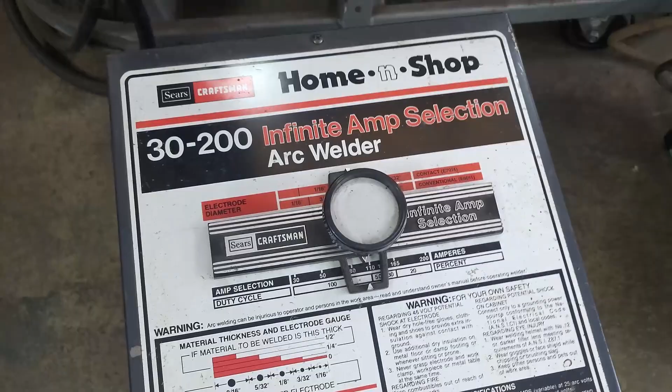This machine in particular is pretty old, probably like 20 plus years old, and it's very heavy. It's a transformer type, but these are known for being very, very reliable. I've heard of guys leaving these out in the rain and then letting them air dry and they fire right up, no problem. I've used it to repair a wood stove and a couple small projects, haven't had any issues with it. It's just really, really heavy.

The next one up here, I've had this for a while too, like 10 years. This is just a cheap little Everlast Supercut 50P plasma cutter. It does come equipped with a 115 volt plug and a 220 volt. And I'll be honest with you, if you try to run this on 115, it's not gonna run very well. However, once you add a 220 volt plug to this thing, it will cut through pretty much anything, even for a cheap machine. This machine right here, I bought it almost 10 years ago for like $400.

And it did actually run on my 8-gallon compressor. It did have to catch up every once in a while, but I used it to cut the holes out on the heat exchanger on the waste oil heater. So great little machine, I've used it quite a few times. Comes in handy to have, and fairly inexpensive. By the way, I forgot to mention that these stick welders, like that one right there, you can pick those up pretty cheap. They're like 50 to 100 bucks if you want to get a really good stick welder.

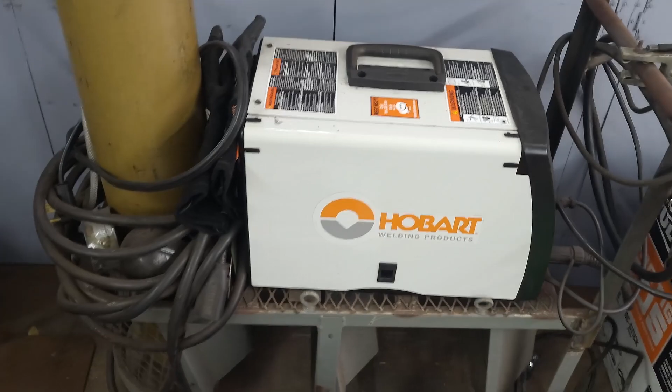Obviously, the next one is my Hobart 190, and my friend and I swear by this machine. We've had this machine collectively between the two of us - he has his own, obviously - but the two of us have owned it collectively for 25 years. And the only thing that has ever happened as far as issues is the wire, the wheel of wire in there will unravel itself sometimes. And the only reason it does that is operator error - you didn't tighten down the tension nut enough. It's a big plastic nut in there that keeps tension on the reel. And that's it, I've never had this thing not work.

It's worked awesome. And the newest machine here is the Vulcan ProTig 205, and I have zero experience using this. I actually bought this after watching many YouTube reviews and people using this machine, seeing how it performed, and going back to some videos where people used it for a year and did another review. It gets a lot of praise on YouTube from a lot of guys that use these, and some of them even do compare it to a Miller. So those are the four machines I have.

So I'm gonna have to build a new cart. The cart that the Hobart's sitting on was actually a cylinder rack that I took out of a work van when I used to work at a junkyard. It served its purpose - it was a little bit of a recycled job, just something to get the welder on to roll around. And the only reason I'm putting them all on one is I don't really have a ton of bench space. I mean, I could put one right there, but that's just one machine or two machines.

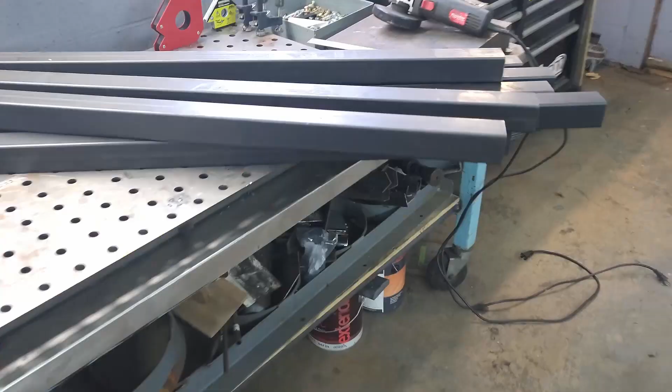My plug is right there, so I need something I can roll all four machines around on. I don't necessarily have a big shop, but all my bench space is becoming premium real estate. So as far as building this cart, I could have bought one. There's only one cart I found, and it was about $300.

It holds 2 or 3 machines on top, but it wouldn't hold all the weight. So I ended up just deciding to buy all the steel, 2 by 2 by 1/8 inch. Total cost for all of this, there are 8 four-foot pieces, so 32 feet of 2 by 2 square tubing, 8 inch solid rubber wheels, some casters, and a little extra steel in case I need it. Total cost for everything on this table was around $250.

So I'm going to end up building something bigger. It'll house all 4 machines, and I think it'll be a lot more sturdy, because a lot of the welding carts out there only hold 1 or 2 machines, maybe 3 max, but they're kind of flimsy, thin sheet metal cabinet-looking welding carts. And the total weight of all this is pretty heavy, around 411 pounds for everything on the cart.

The one big thing that's adding a lot of weight is this cylinder right here. I have a 300 cubic foot cylinder for the TIG welder, and I have my 125, so that's a lot of weight.

First thing I'm gonna do is sketch up what this looks like, take all the dimensions, and draw a diagram. I normally use my 2D CAD program to design things, but I think I'm just gonna go old school this time and draw it out on paper.

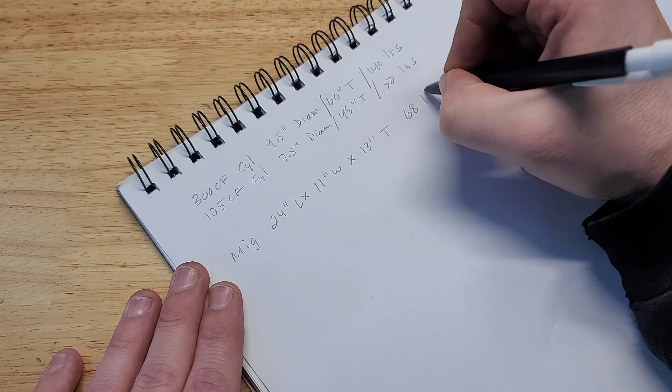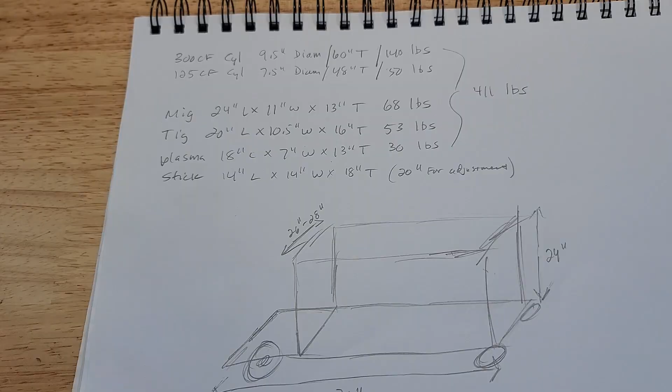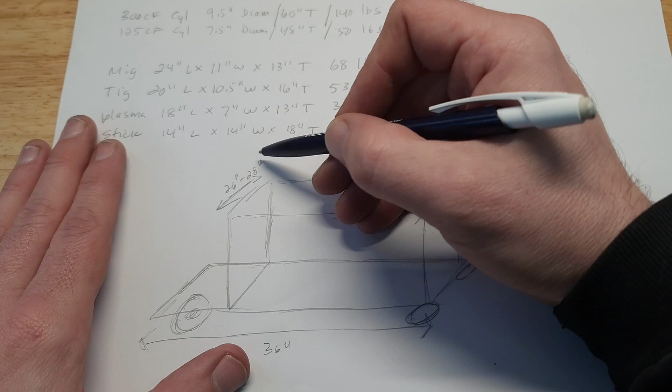All right, that wasn't too bad. So this drawing is the basic setup, the most basic version. You might have to extend some pieces up and over this way so that when I put the cylinders here, I'll be able to tighten them down so they don't move. But if I were to make it as simple as possible, this is basically it.

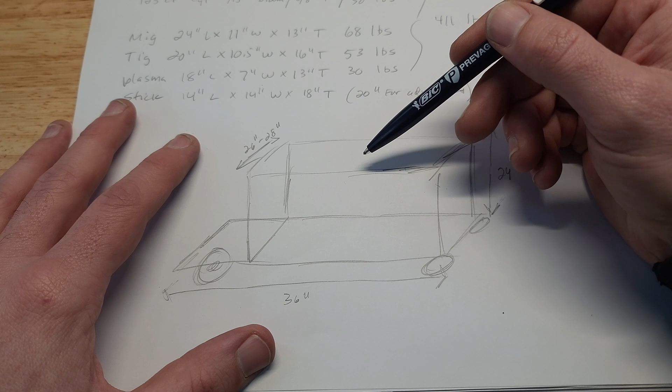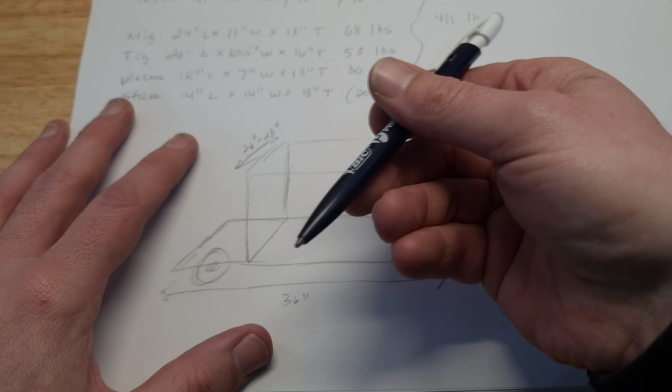It's just a rolling cart. Now keep in mind, I said I could have bought a cart, but I didn't find one exactly to my needs, because the way I want to do this is 2 machines on the bottom and 2 machines on top. I'm going to do stick and plasma on the bottom, and the MIG welder and the TIG welder on top. They'll all be facing this way, only because the way it'll roll up to my table, the plug will be behind it all the time.

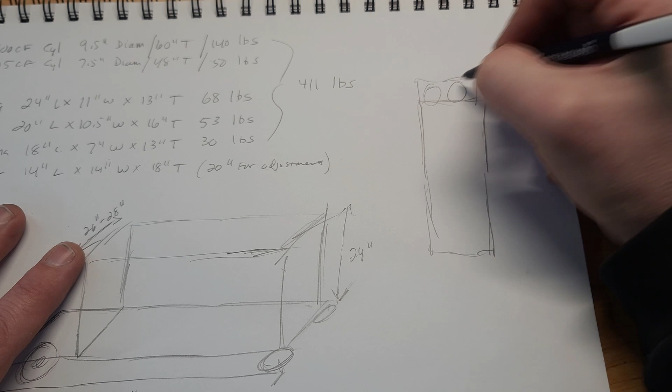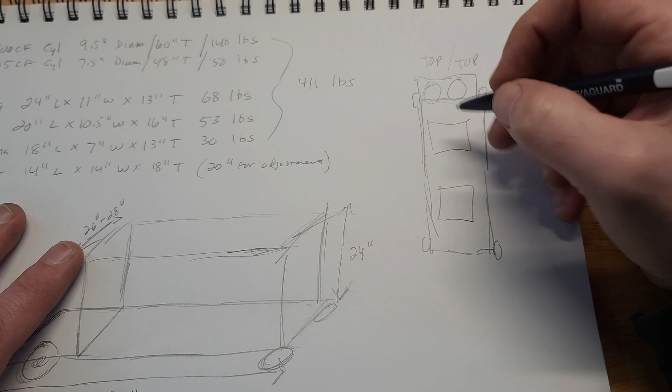So basically what I want to do is draw each shelf. If this was the bottom shelf, it's going to be more square, but you get the idea. I'll have a cylinder here and a cylinder here, and obviously my wheels will be here. And I want to do the 2 machines. This is the top, like a bird's eye view, this is top of the top. So this would be my MIG, and this would be my TIG. And then the bottom would just be the stick and the plasma.

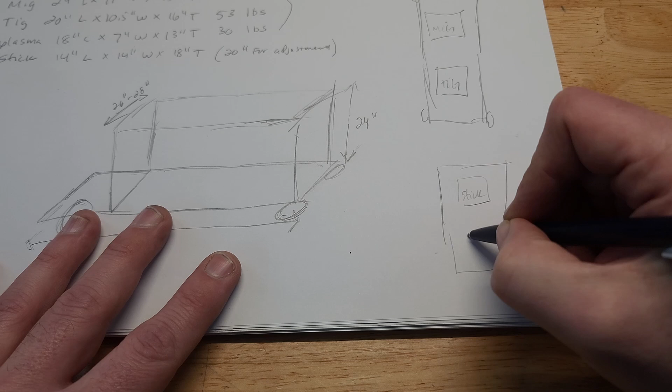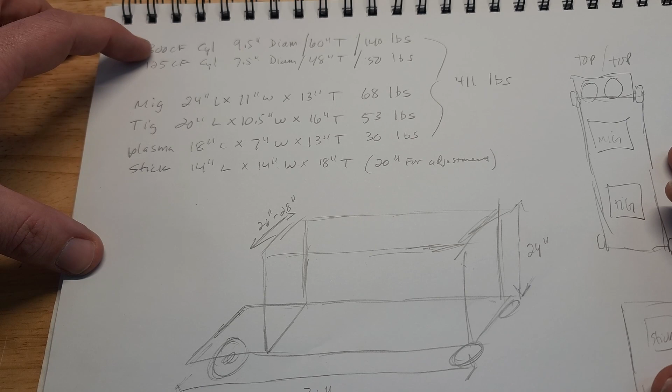Pretty easy to draw. I mean, like I said, this is just like a rolling cart, but I like to lay everything out, get all my dimensions, the weight, to make sure I have wheels and casters that can handle that much weight, and all the maximum dimensions of everything together, because the MIG and the TIG will be on the same shelf. So I need to build it wide and long enough to accommodate both of them side by side with maybe an inch or 2 of space between them.

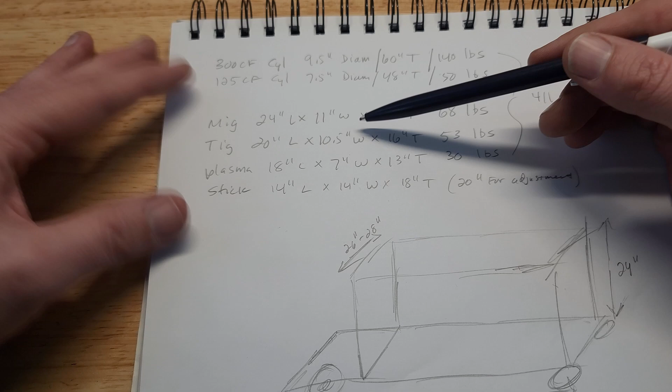So normally I would have done this in my CAD program, but I figured this wouldn't take very long. It probably took less time to just draw this out than to go down to my computer, fire it up, and open the program. So let's start cutting.

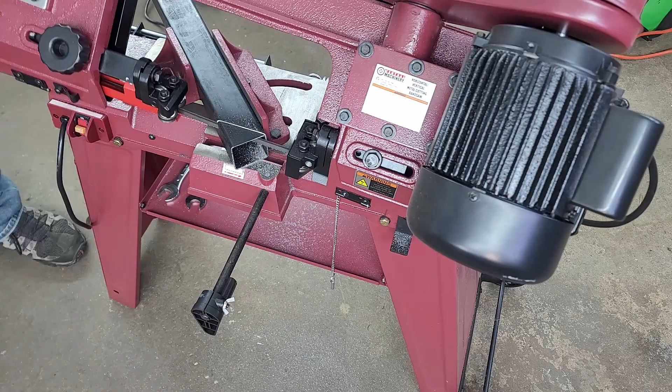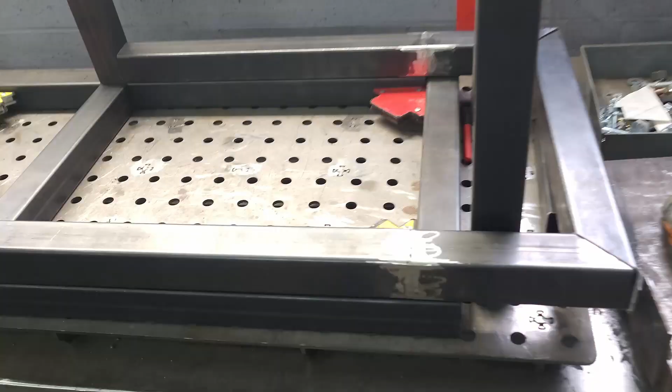All right, got all the pieces cut, and I actually made a mistake. You can see where I had to pay for that mistake. I wanted to orientate the welders on the top side by side, but I totally forgot that I can't have the MIG welder facing this way because I need to be able to change the wire out. So I paid for that mistake by having to re-weld a piece back on. Not a big deal though.

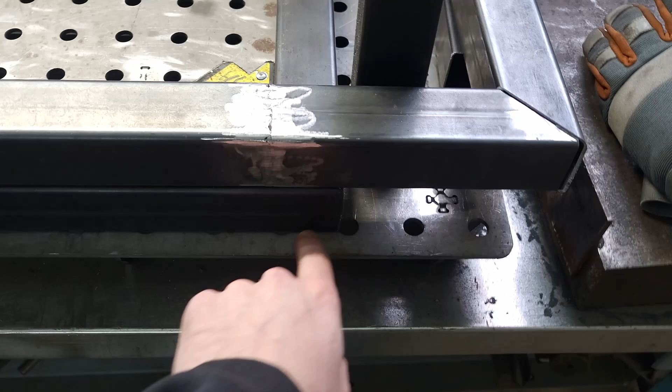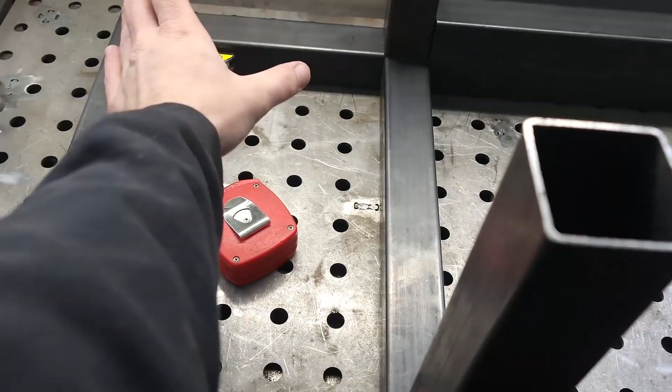So this is basically what it's going to look like right here. Kind of looks a little funky. It's not set up correctly because I haven't tacked it, but this piece here, the bottom, that's the bottom shelf. These are just simulating 4-foot pieces. They'll come up 4 feet, and I'll probably put something across them. So the two tanks will sit here next to each other. This whole second shelf will be up on top of here, and that's why I'll have the two welders here, plasma cutter, and the stick welder, or vice versa.

So it actually works out because this is going to have that amount of overhang, and I could put some hooks on it or something to hold the welding helmet, gloves, whatever. I had purchased just enough of the 2x2 square tubing to do it. Luckily I didn't screw up too bad, I just had to weld a couple pieces back together. I would have liked to have had it a little bit shorter, but live and learn, right?

So I'm gonna get this all tacked together. I may build the shelves first, like the floor of the shelves.

And for that, I wanted to talk just one quick second about the price of steel, because steel has gone up quite a bit. This is what I was originally gonna use, just expanded steel, and use some 1/8 inch bar stock flat steel or something just to kind of give it a little support.

Now I bought this piece right here a while ago to make a guard over the belt on the waste oil heater. I can tell you I paid maybe 20 bucks for this, for a 2x2 piece of expanded steel. Nowadays, if you go to buy a piece of this at Home Depot, it only comes in 1x1 foot squares, and it's not as thick. It's very, very thin. It's very flimsy.

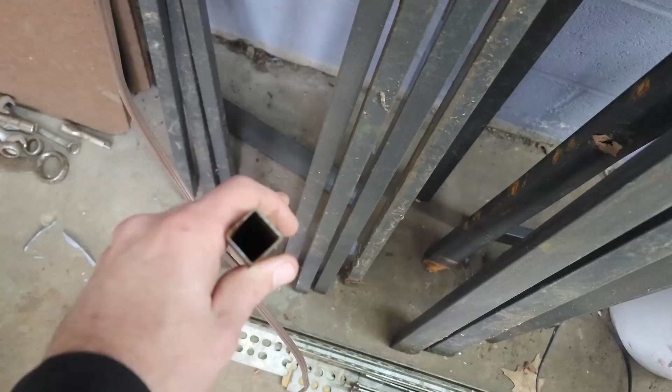It came with other pieces of tubing, like this, I think it's 1/2 inch by 1/2 inch square tubing. It's kind of thin, but it's usable steel. It's all powder coated, so it has a little surface rust on it, but I think it'll clean up pretty nice, and it's very, very rigid. It's definitely gonna be a lot more rigid than if I had used the expanded steel. So that's how I'm gonna make the shelves out of it.

All right, here we are.

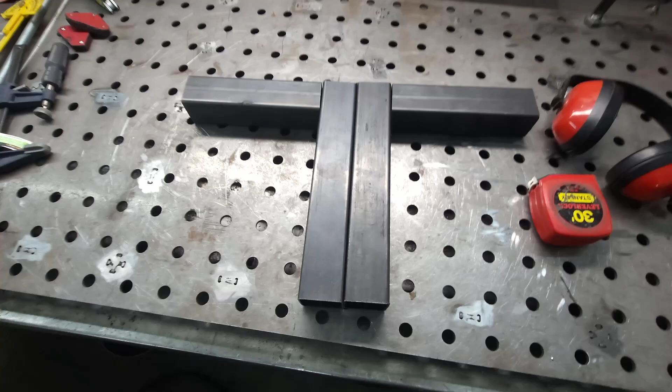I got a little exploded view for you before I start welding it together. I got my 2 towers that the cylinders will get fastened to, secured to, and I had just enough scrap steel left over to put a bar across. It might look funky, but I'm thinking if I extend this down a little bit and put caps on it, I could actually put my filler material in there, my filler rods for the TIG welder.

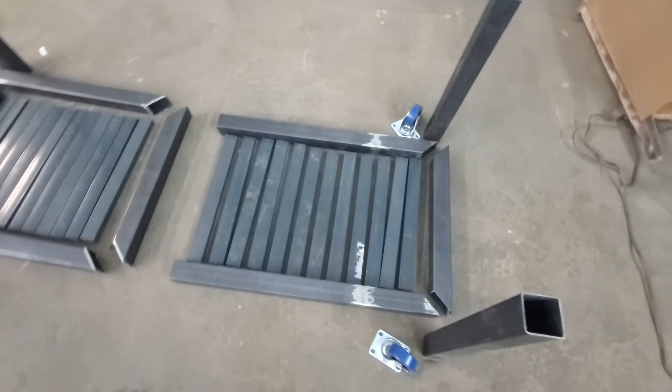So, back to this. This is the bottom shelf here. It's kind of together how it would go. These will all sit flush up against the top when it's all welded together. This is the bottom shelf. Once this is welded together, it'll be welded on top of these, and then these will just be butt welded right against the top posts.

So, all in all, it's gonna be pretty beefy. I think it's gonna suit my needs just fine, and I built it beefy because it's gonna be carrying around 450 pounds of weight. So we'll see what it looks like when it's done.

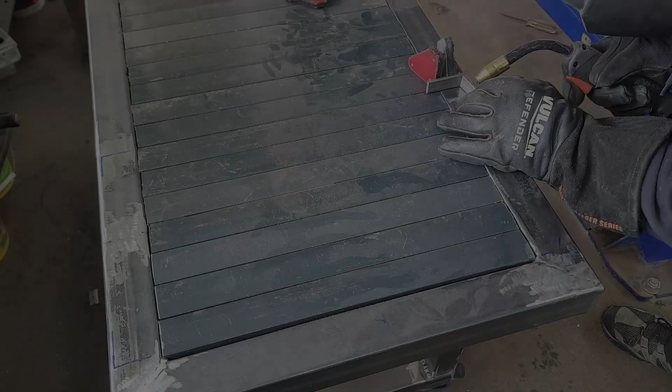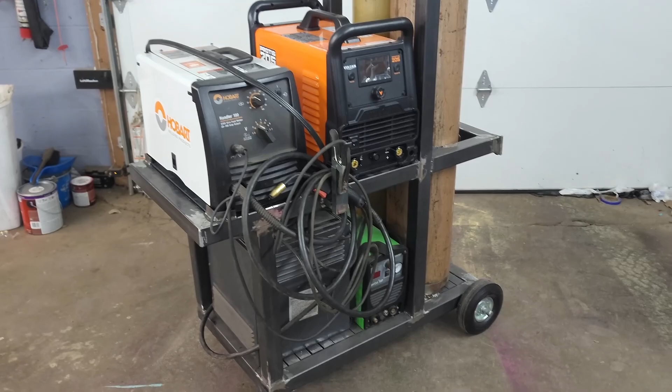Well, there she is. She's looking good, and she's heavy. As you can see, I did add one hook right there for the MIG leads for now. I may add a bar that goes across the top with a couple hooks. I kind of want to set up all the machines, add all of their cables, and then I can figure out where it's going to naturally fall on the machine so that they're not just hanging off the side.

Because honestly, I don't really like that, it kind of looks sloppy. But for what I need this for, it's gonna work. There's a lot of weight on that cart, and it rolls around really nice. I gotta add a handle.

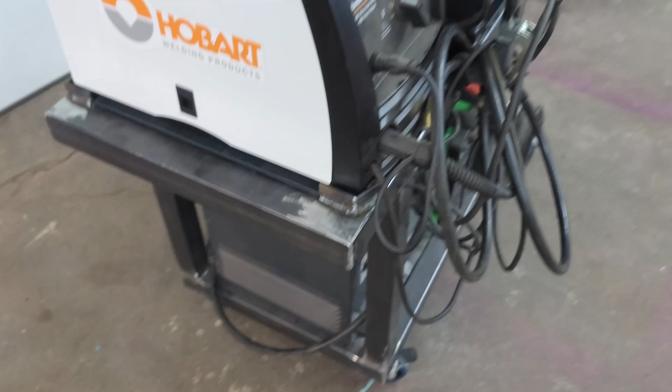See, I have to be careful where I put my handle because I have to be able to open this door. So I could probably put one right here, but it's actually not that bad to roll it around. It rolls nice. I did put locking casters on it so it's not gonna go anywhere.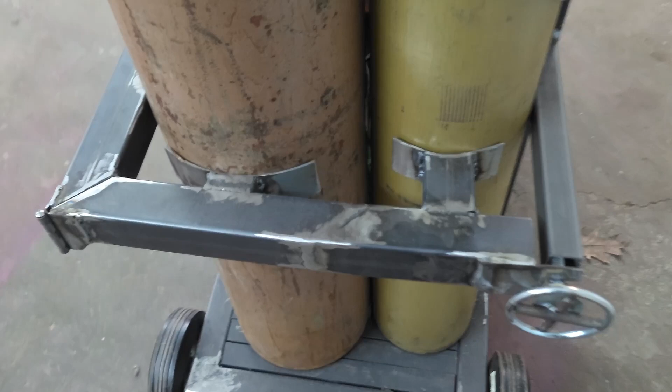Got my cylinder lock bar, which is kind of a mistake. I'm willing to admit my mistakes. What I should have done is just square up both bottles to this bar and put this behind it to simplify it. I spent way too much time doing this, but it works. It locks the bottles in place. It's not going anywhere. These are real tight.

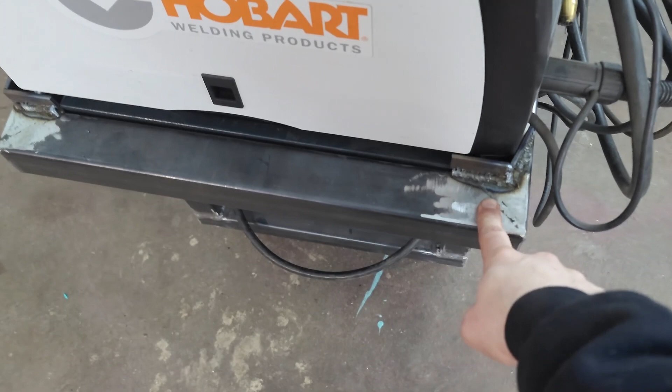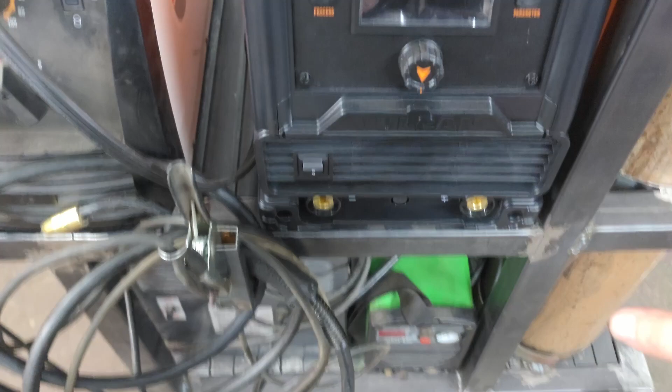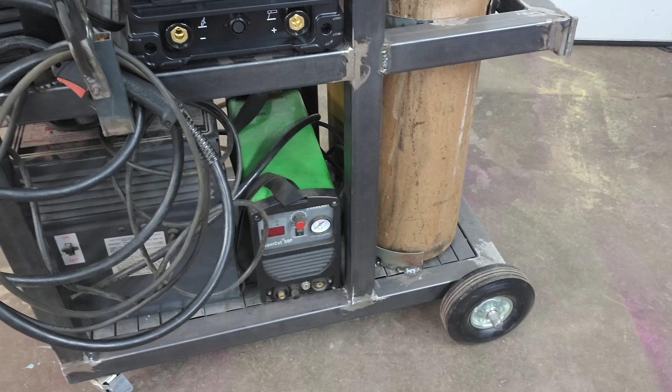So I literally made this cart just the right size to hold the machines. I have a feeling that the cable management, I can make it somewhat tidy. It may look a little messy, and I may even leave some of the leads off. Like I might not attach the plasma cutter leads. I might just coil them up and put them on top until I'm ready to use them, only because I don't use that very often.

But all in all, this was a fun project. I think it came out pretty nice. It's pretty heavy duty, and it costs around $250. So hopefully if you're looking to build a new welding cart, and you need something this big, it'll inspire you, give you some ideas. But other than that, as far as this build, it was fun.

And I have another build coming up very soon that is much, much bigger than this, and it's probably gonna take me way more than just a couple days in the garage. It may take me 6 to 8 months, and I will be making a series out of it. And it's something I've been waiting 14 years to do. So I look forward to that. So stick around. Thanks for watching.